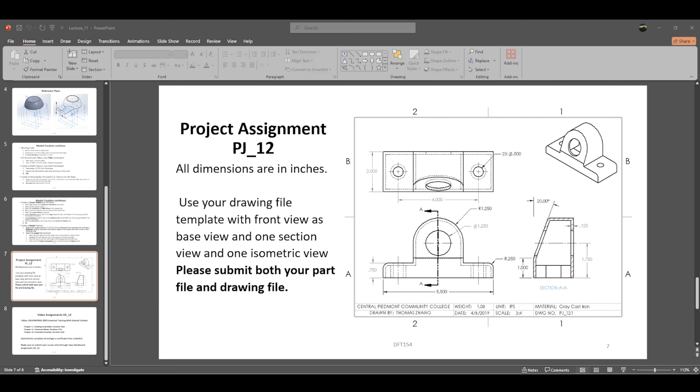We'll get started sketching our part and features, starting with the front of the part. Go to front plane and hit normal to. See how it flipped it around like that? That's not correct, that shows the back side. We want to click it again, make sure that's on the left, and it'll be on the front side.

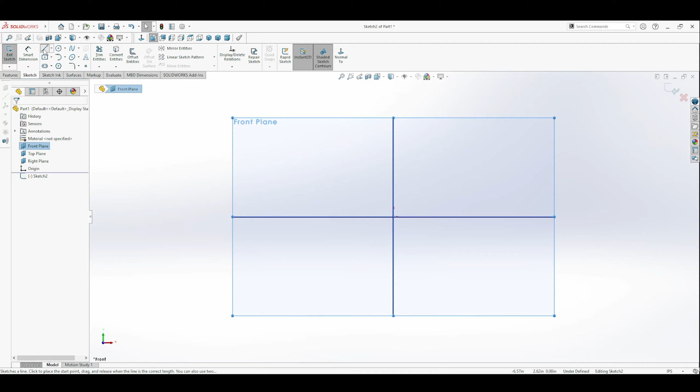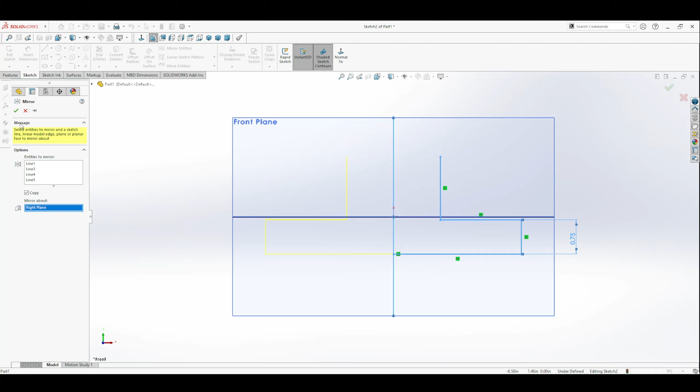Extruded boss, and then we'll sketch some of the features here, and we will mirror these entities across this plane right here. There we go, mirror, and then just hit the check. Everything is equal now.

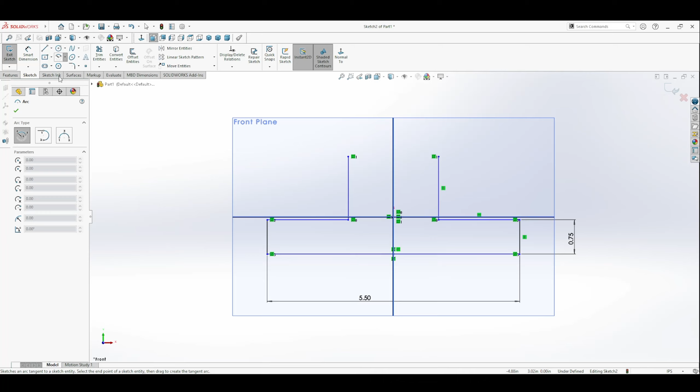This guy is 5.5. How do we know how long this step is? Don't think we're given that information, so let's just roll with the arc, and that would give us the information I think.

So 1.250 is our radius, and put in the hole over here, and our hole is 1.250. We just need to make sure that - alright, so this is the height now. We're given the height of the hole to the base.

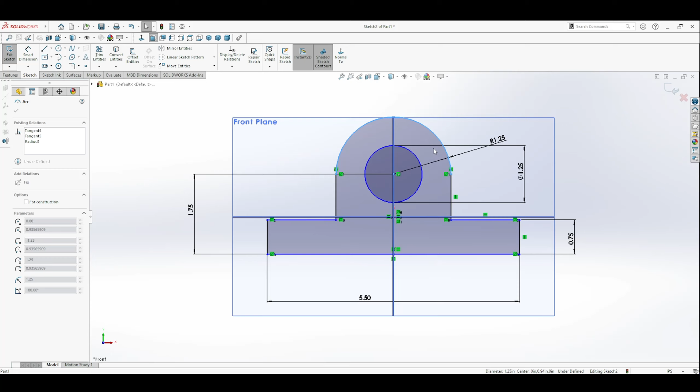That's 1.75. So why didn't it lock in? There's something else we're missing. Oh I see, okay, so that plane just needs to be, or that line needs to be collinear with that plane right there, and everything locked in.

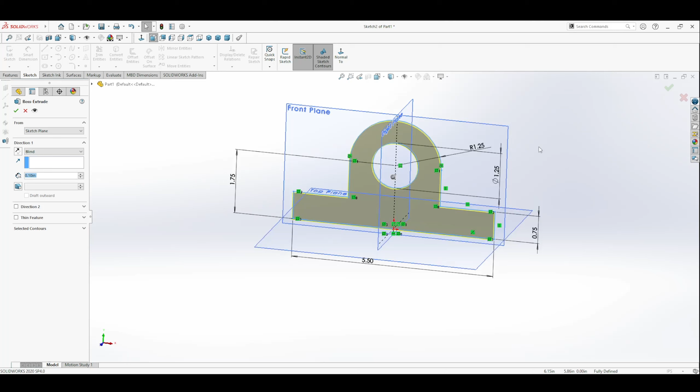You'll hit the check, and you'll do your extrude, but I want to do it mid-plane, and it's 2 inches wide. So there's the first feature of your part. It kind of looks like this, with a little hole in the middle.

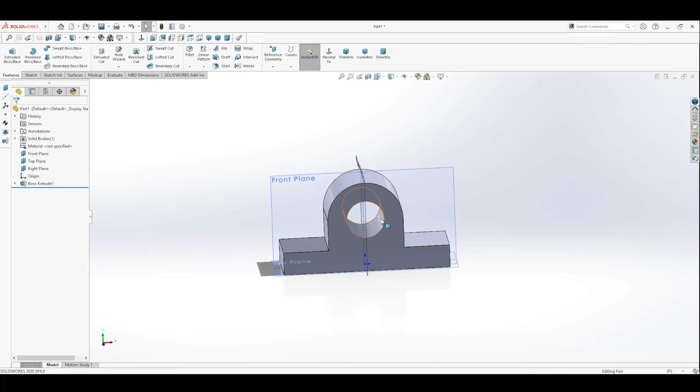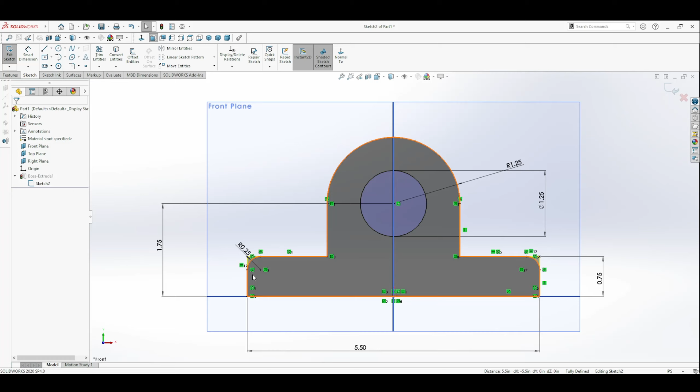But there is something that we missed. If you go back to normal to here, back to the feature on the sketch, we've got these fillets here on the corner. Click on the 2 corners, and the fillets are 0.250. Just make sure those filleted correctly, then hit the check and get back out of that, and there's your rounds.

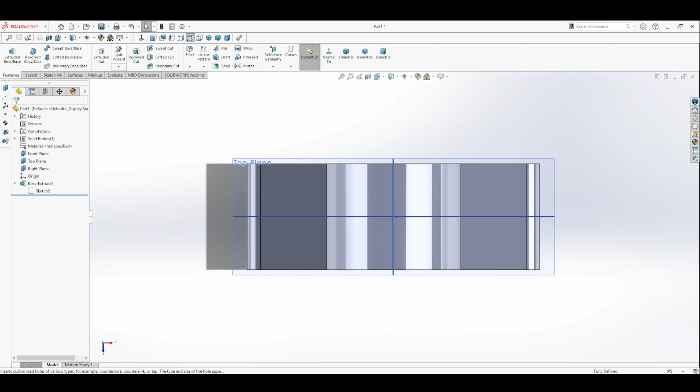So now it's correct, and we'll go to the next step. There's a couple of holes, so click that surface, normal to, and we'll do hole wizard. It'll be just the regular hole, but make sure there's no countersink, and it's a half inch.

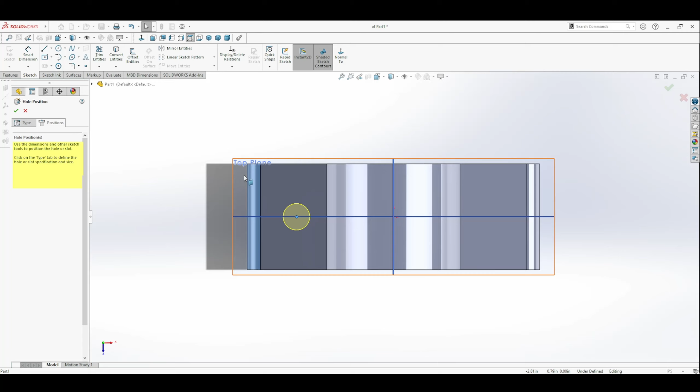Scroll down on the left side here and find the half inch. Click on position and just kind of snap it to that front plane, and let's see.

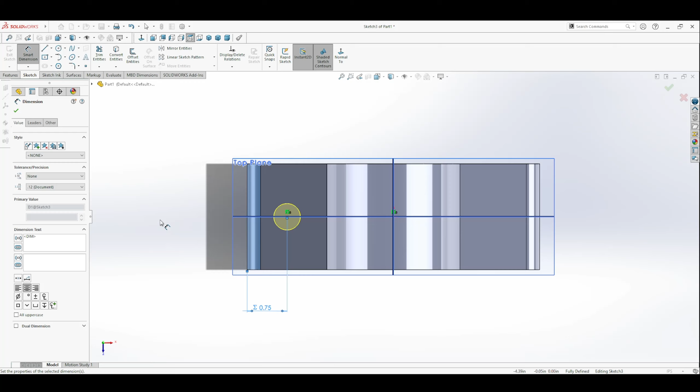Let's see what that does. 0.75, okay, and that's it, so it should be locked in place. You'll go ahead and hit the check for the hole, and you should have your hole.

What you're going to do is mirror that, and you want to find the mirror, and you're doing it across the right plane. Just hit the check, and there's your holes.

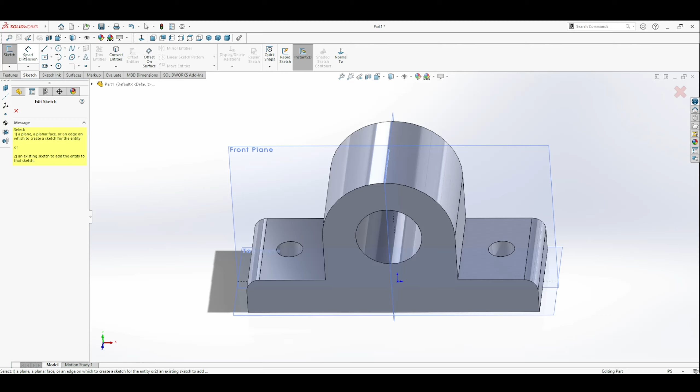You could, just for reference, check the center to center here, and see it kind of shows down here, kind of funny looking. But you can see it's 4 inches apart, so that's what it's supposed to be. We'll just get rid of that dimension.

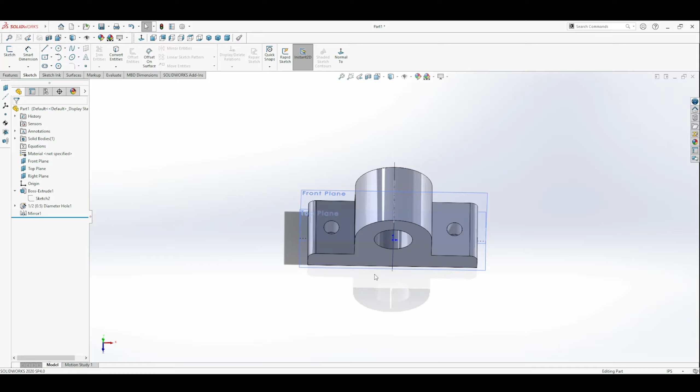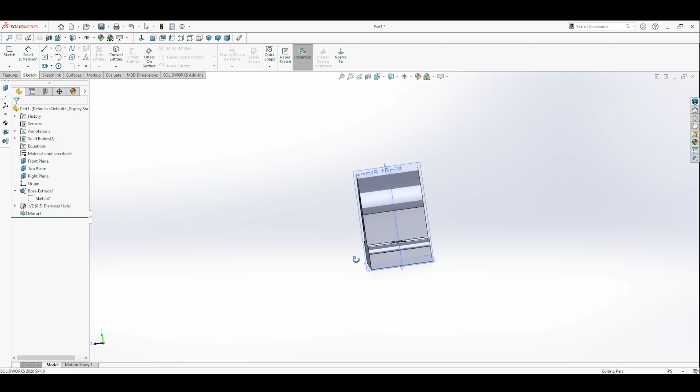So there's step 2, and then the final step, actually it's 3 out of 4 steps. The third step will be to notch this front surface here. So we want to make - how are we going to do that? You could just come in from the side and draw it.

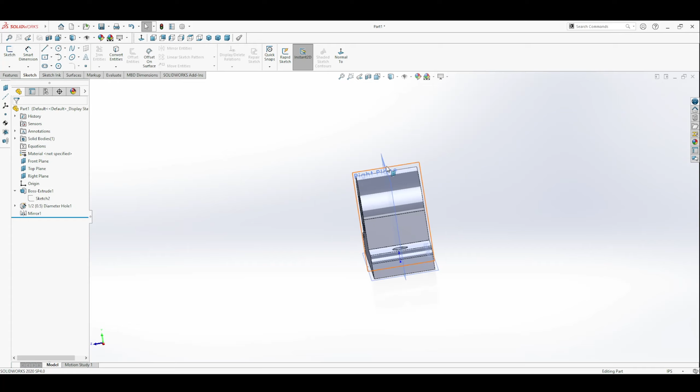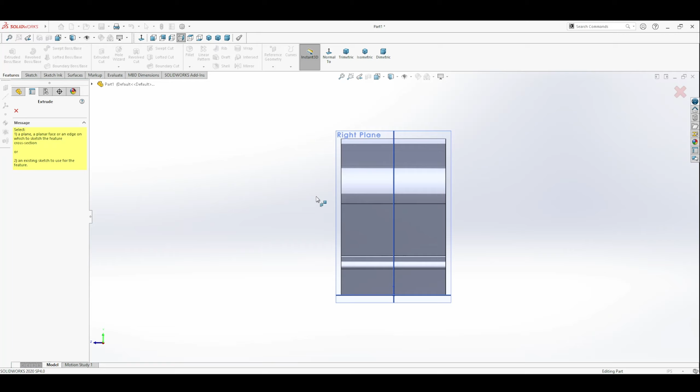But we're not given any dimensions there for the cut, except the angle at 20 degrees. You're only given like the step. Let's see how we're going to do this. Let's just come in on that surface there and hit normal to, and then just start, it's going to be an extruded cut, and start sketching. So we got this line like so,

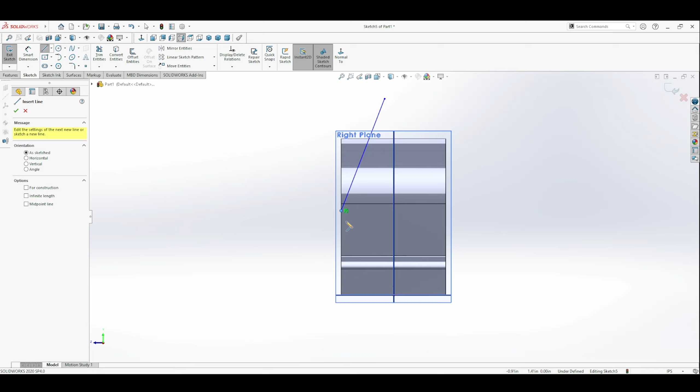and we know it comes to that surface, and we just need to know the dimension of this to the very bottom of the part. That's 1. And we're given the angle from the front to that.

Actually, is that correct? Yes, yes, yes. So we're given that angle here, it's 20 degrees. And we can just snap that to the top and sketch a couple of lines here, or you could use convert entities, however you want to show those lines.

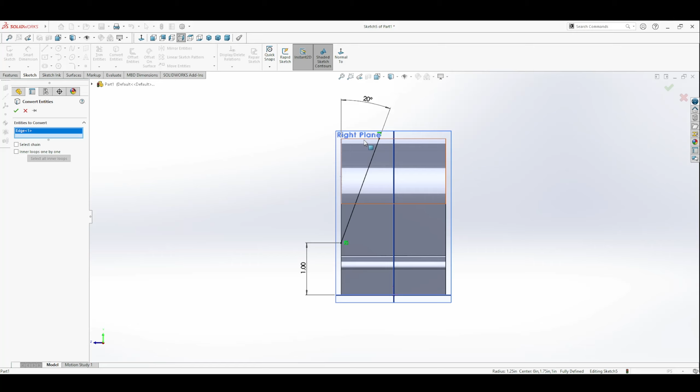In my case, I just need to trim these entities that are extra, and there's your cut profile. Hit the check, and it's going to be

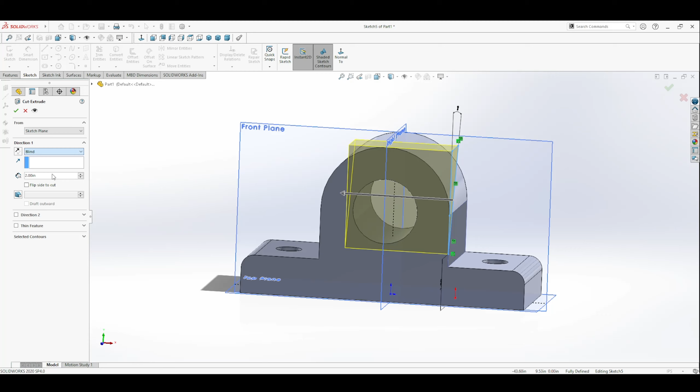through all both. I wonder if we do up to next. No, see, that's because we're not taking it from the plane. You know, if we did the - wait, why does it show?

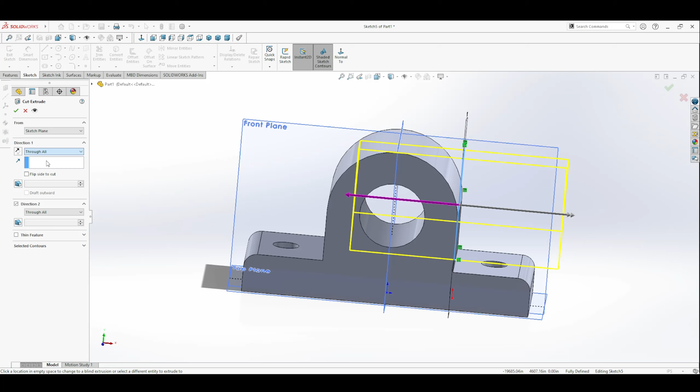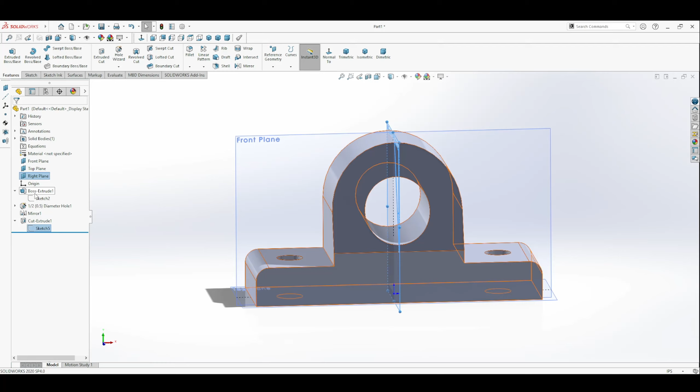We're just kind of going through the options to see what I can do, up to next. I know this will cut it away, but it's kind of a clumsy way to do that. So let's see if we can change the plane of - why did I get into sketch? Change the plane of the sketch to the right plane and go back into edit feature. That's looking a little funny.

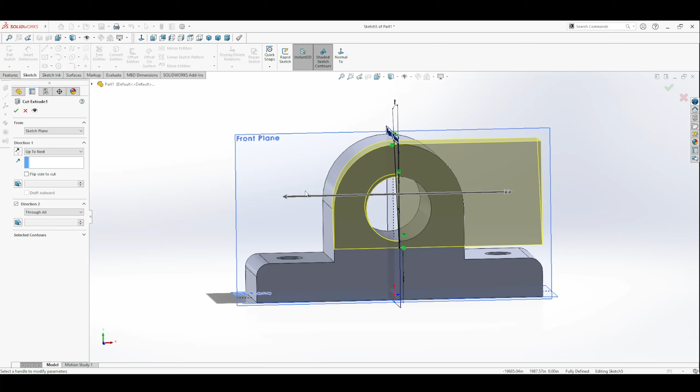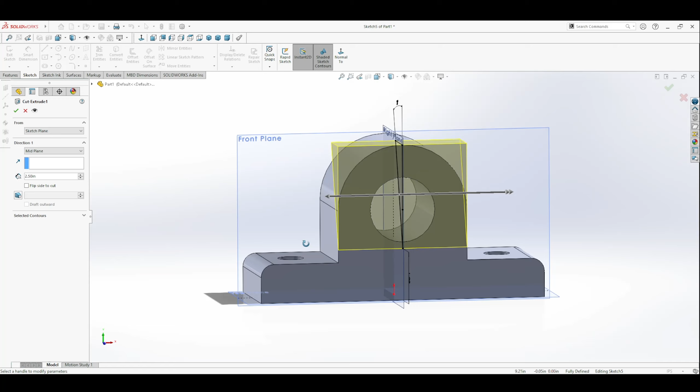It's tricky here because you could have something on the right side that might get accidentally cut. So I'll do mid-plane and drag those to carefully come out, just like so, so you're only cutting away what material you need to cut away. Then hit the check, and there's your slanted edge feature.

And then finally you've got the shell feature, so you'll go into shell. You only want to select the faces of the holes, don't select anything else, because shell removes material around the feature up to the next face with this thickness parameter. If you were to select this face, it would just remove it entirely and you'd have a hollowed out part.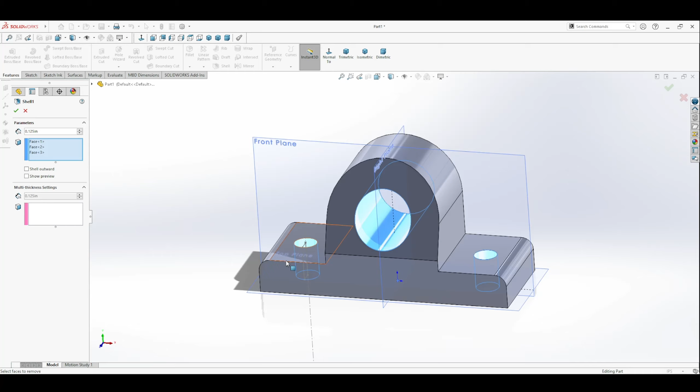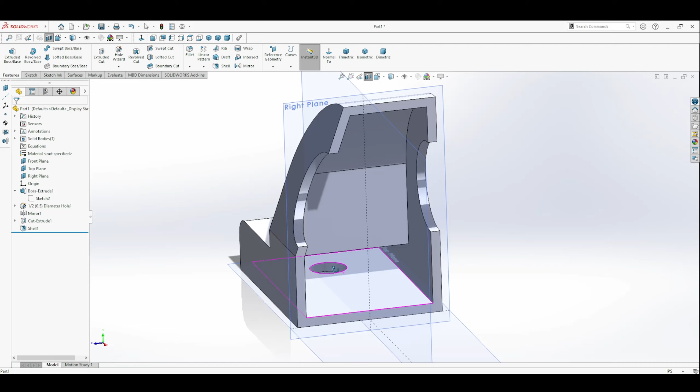So you just want to have the holes selected here, and if you hit the check, it hollows it out. If I show you a cutaway like so, and get normal to that, there's your cutaway. It's got thin walls just like the sketch, and it's all hollowed out on the inside.

I believe that's all we have to do for the model, and next we'll go to making the drawing.

So now we'll be creating the new drawing from our template. Go ahead and go to new, make drawing, find the template you created in the last assignment, and hit OK.

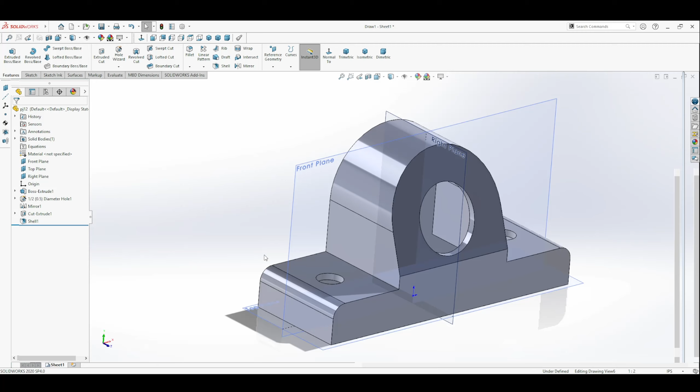You've got your views that come up, and we need the front view, a top view, and an isometric view, and that's it. The sheet scale needs to be 3 to 4.

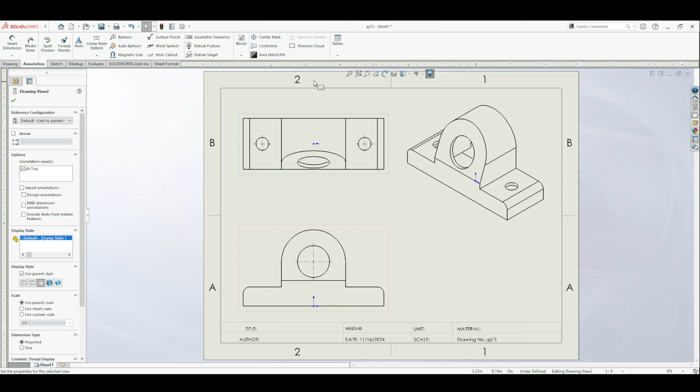We'll just kind of move these around. Sure, like that. Oh, it's got all these dotted lines.

We don't want the isometric view to have the parent style, so uncheck use parent style display and just use hidden lines removed, and that's your isometric.

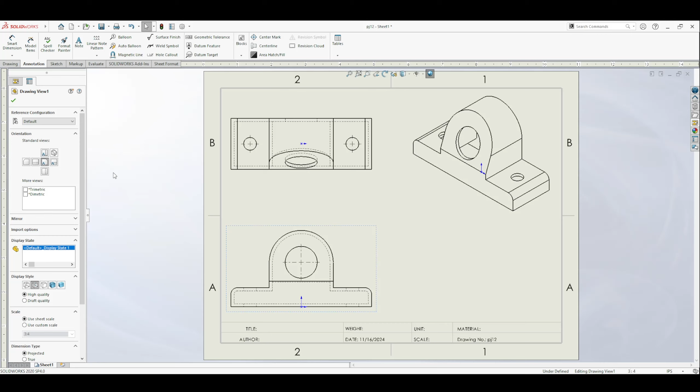And finally, there's going to be a cutaway view. That's a section view, and you're just trying to get it to the center line right here, and right click, bring it over here, and that's it.

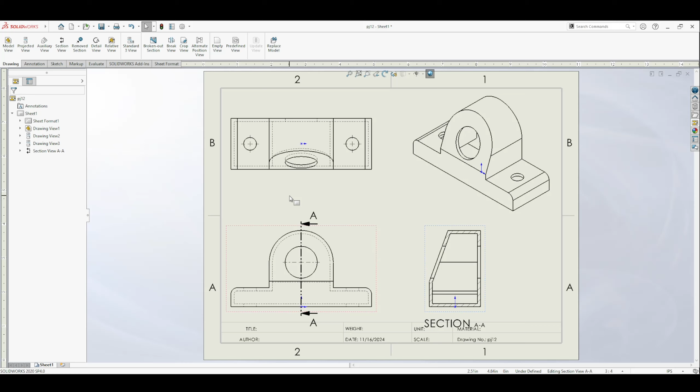So there's your section view, and we'll go ahead and show dimensions for everything. Annotation, smart dimension. We've got a dimension here, one there, one there, right here, here. Don't worry that everything's spilling over the edges, we'll fix that in a moment.

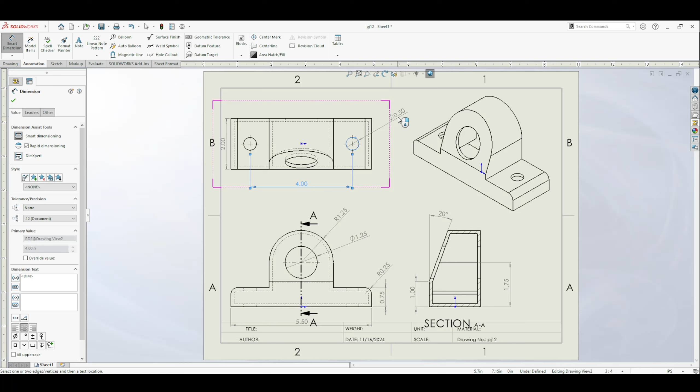Let's try to make this angle, and then see, and the thickness of this. See, and there's a hole right there. And you'd come over here, and you've got two of these.

And that's it. So you want to highlight all the radii, set up the leaders to go from the outside, custom text, and horizontal. Hit the check.

Except these two and that one are showing the inside leader. We don't want that, we want the outside leader. Try to find what combination of things works to break that relationship.

Okay, it worked over here. I think you have to do them one by one. So you'll have to do it one by one. Go to leaders and one arrow open leader. And that's it there.

We've got, let's see, let's move the views a little bit to make everything fit. So in my drawing, I just kind of cleaned everything up, and I show all the dimensions here. You just adjust your font sizes, your leaders, everything to make it nice and clean.

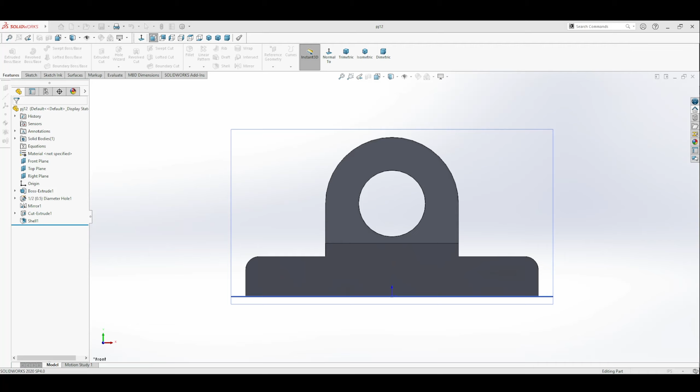So you would go through and put in the different things you want to show on your drawing. We've got weight, which is mass. We've got material, linked to material. We've got our description, which I believe was like the title of the document, so we'll just put it as that.

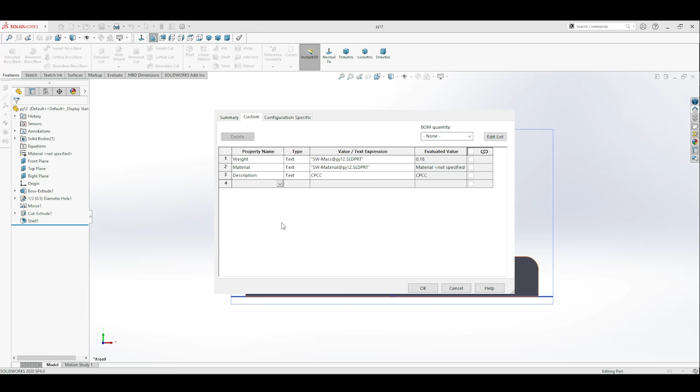Then we need to find, it's either drawn by or author, I don't remember which of the two I used. Let's see if drawn by works. Just put this in, and the date auto populates.

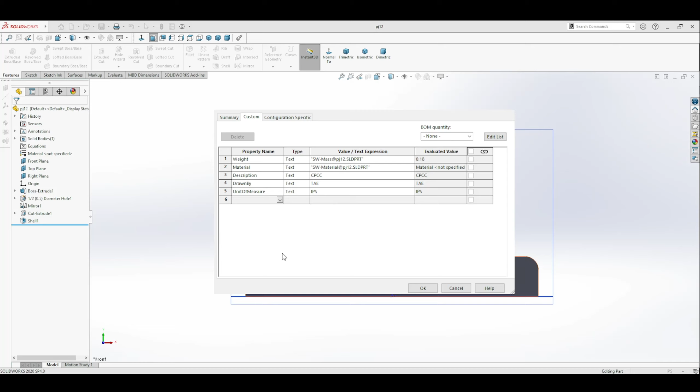Oops, unit of measure. Can I link it? No, so we'll just say IPS. Got material, drawing number, scale. Do we have... no, I think scale will auto-generate from the drawing, so I think that'll be it.

We just need to make sure our material is the cast iron. Go find it, gray cast iron, apply it and close.

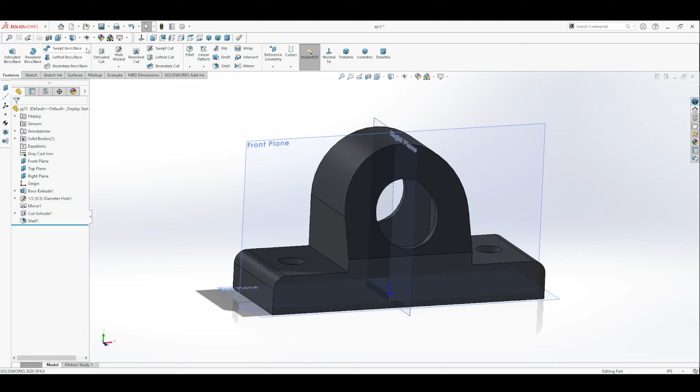Just make sure you're saving along the way. Go back to your sheet. Yes, we know, so we've got gray cast iron that loaded in, unit, weight, date, title. So we're missing author and scale.

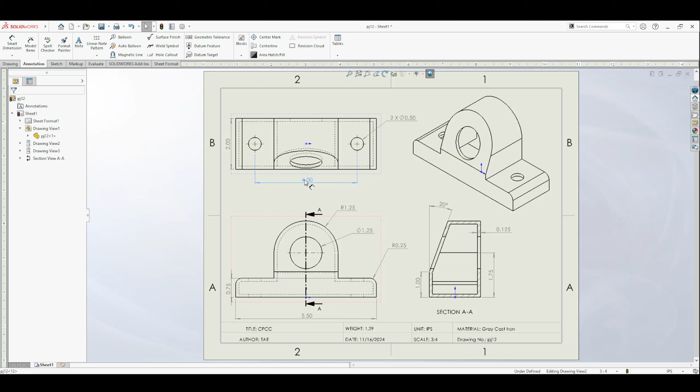So I went and verified all my dimensions, made sure all the views were correct, made sure I was happy with the font sizes and the placement of the dimensions. Go through the title block down here, make sure all your information's populating correctly, and your scale, your material, everything like that.